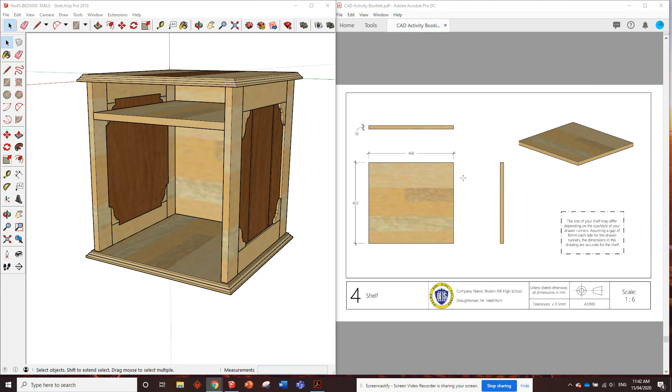You are to design your own profile for the plinth. I'll show you how I drew this one, I'll see if I can remember how I did it. But try and do your own design, don't just copy mine, try to customize your own.

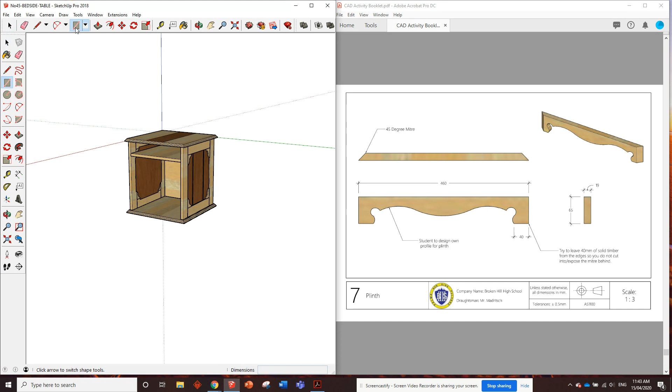We'll draw it a little bit out of the way, not underneath, so we've got room to play with. We'll go here with the rectangle tool. Remember, you've got to hover over the origin point first if you want to snap onto that green axis line. So we're going to put in a piece that's 460 and 19 millimeters thick.

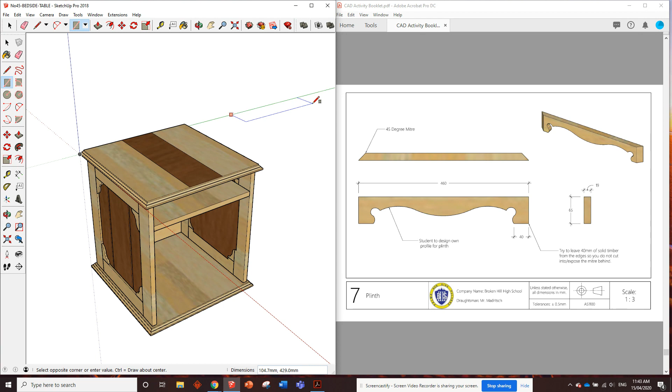So we'll go 19, 460, and then we'll push it up by 65 millimeters. 65, enter.

We'll triple click, 1, 2, 3, right click, make component, call this plinth. Now, double click to edit it.

First thing we need to do is put miters on the corners, probably the easiest part of this to do. So we grab the protractor, click on this corner, make sure on the blue axis, click once, click in the opposite corner, drag it out that way, and type in 45, enter. Exact same on the other side.

Click, click, and 45. There's those 2 lines we can trace. Grab the pencil tool, go from the corner to the intersection, and we'll just use the push-pull tool to get rid of those. So you can see we've got miters on the corners now.

Now, there is one thing that I specified in the drawings, which I'll show you in a sec once I get rid of those guides. It says try to leave 40 millimeters of solid timber from the edges, so you do not cut into or expose the miter behind.

When we're actually making this design, if this part of the curve finished really close over here, you would actually see the miter behind, you'd expose this miter joint. So we want to try and leave at least, I think that's going to only be 20 millimeters. But if you leave a bit more of a gap, it's just better safe than sorry. Try and leave a bit of solid timber on the edges.

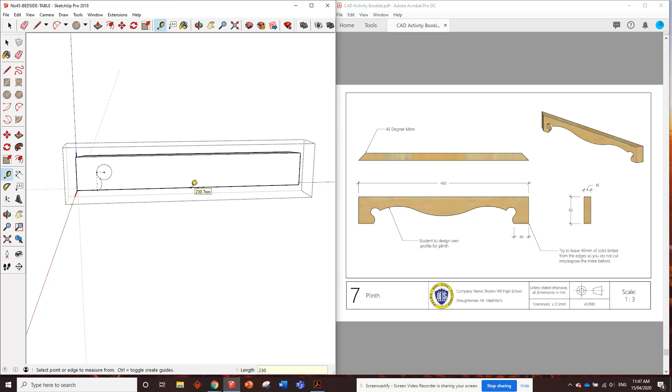No, 230. There we go. There's our center line. Now the bottom of this arc, I reckon that probably looks... what we're actually looking for is where these two arcs meet, which I reckon is somewhere around there. And that might be halfway.

So if this is 65, halfway up would be 32.5. So 32.5, and let's say it's 70 millimeters out that way, and 70 millimeters out that way. Right, we'll grab a 2-point arc from there to there.

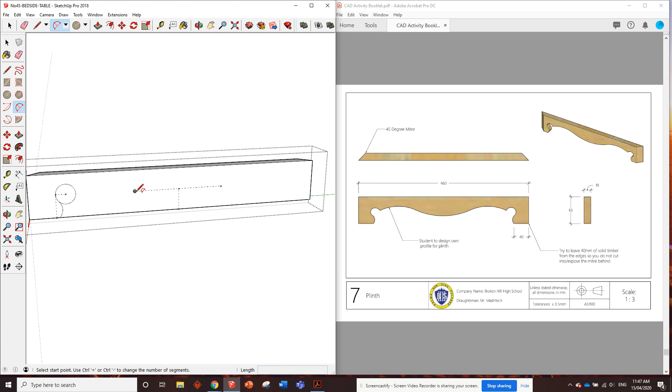We'll go down, bulge of 15. I think that looks pretty good. And then we go from here to probably here. Does that look okay? That looks like a nice, smooth curve, but I'm not sure if I'm happy with this. Oh, hang on. Oh, that didn't actually touch there. That's a problem. Control Z. Here to here, maybe.

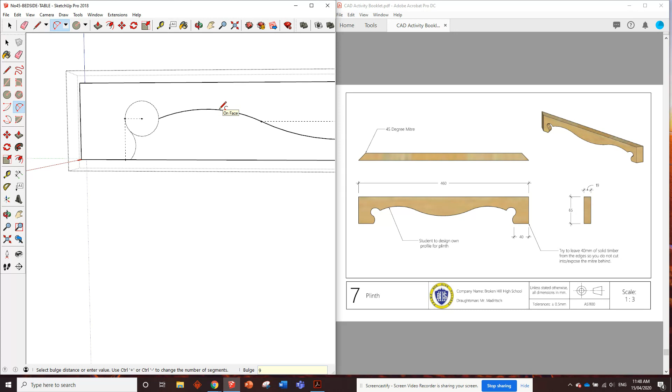So can I get that tangent somewhere? Maybe a bulge of 9. That looks like a pretty smooth curve. And now I can erase that. And yeah, that looks pretty good. I'm actually pretty happy with that.

Let's put it across to the other side and see what it looks like. So to do that, we'll just need to measure in from the corner, 40 millimeters in. We'll need to pinch this line, that line, and that line. Press Control C. We want to get the Move tool, hit Control, and grab it from that bottom point.

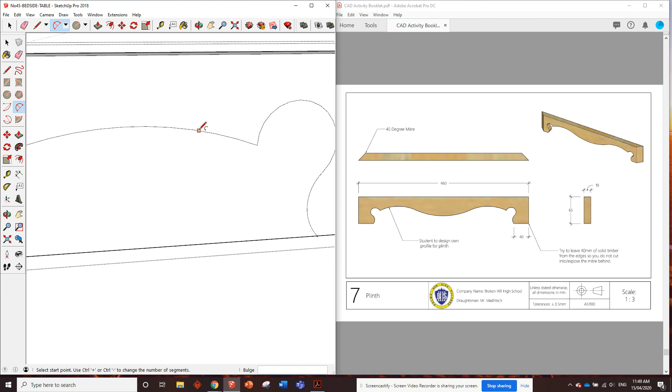We want to right click on it, flip it along the green. Yes, first time. How good's that? Okay, move it to that point, and I guess we're gonna have to delete this line and just put it in again, from here to here to the end point. And what was the bulge? I think I said 9.

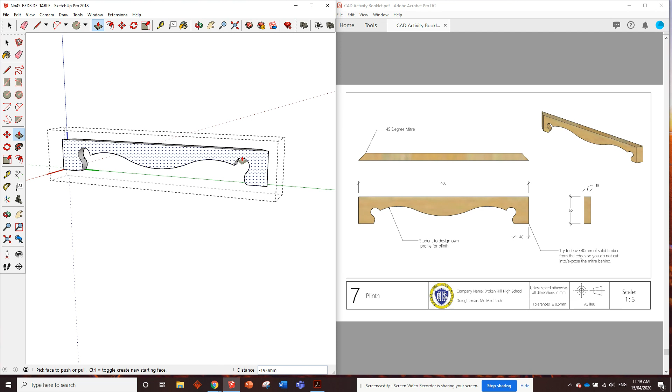Okay, so that looks pretty symmetrical. And if I push that away, yeah, that looks quite nice. Pretty fancy design - this is one of my weak points in woodwork. I suck at designing stuff and making it look pretty. But if I were to do it again, or modify it, I'd probably move these circles a little bit further down because I think it maybe looks a bit too skinny up the top there. Other than that, I think that looks quite nice.

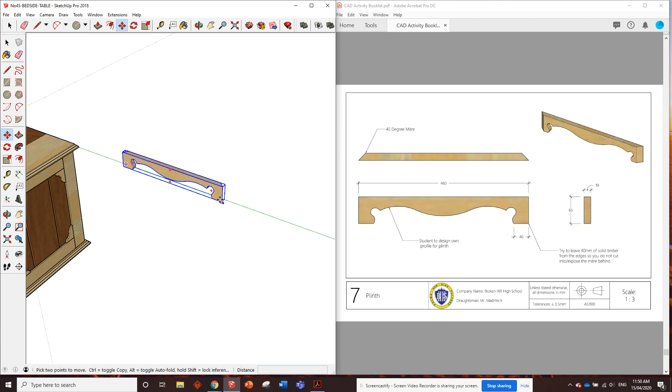So let's leave the component. Let's paint it. So where's my paint can? There we go. Now, to multiply that four times will be pretty easy. We've just got to use the Move tool, hit Control, and grab it, make a copy.

Then on the top edge, grab that red node, tilt it to 90. There we go. Grab it on the corner and move that to the next corner. Now, we can select both of these if we hold down Shift or Control. Then we can grab the Move tool, hit Control, make a copy of both.

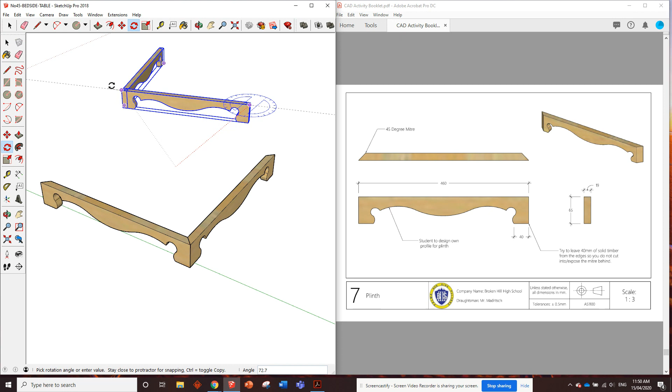And then we can again, there's no node to rotate that. We can use this, the rotate tool, from here to here, and swing it around 180 degrees. Grab the Move tool and put it from corner to corner. And then we've got a nice sort of square base to go underneath.

So let's highlight all of that, right click and make it a group so they stay together, so whenever we move one, we move them all. Yeah, that looks like a pretty nice base, I think. Kind of matches that sort of fancy profile, I guess.

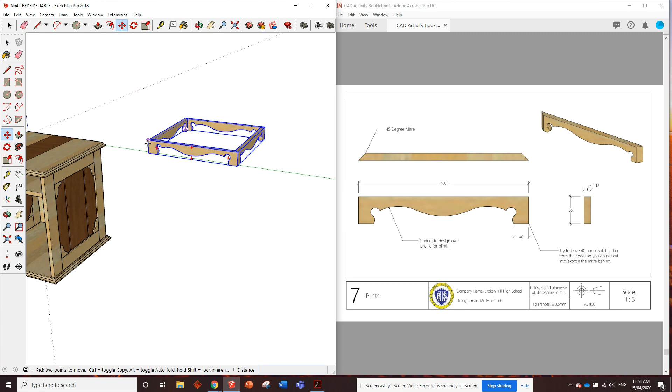Now, let's grab the whole thing. We're going to move it to the underside. So grab the top corner of it and move it to that bottom corner here, right? Then what we need to do is, just like we did on top, we're going to measure this gap from there to there, and that's 40 millimeters. So we need to move it along this direction, 20 millimeters.

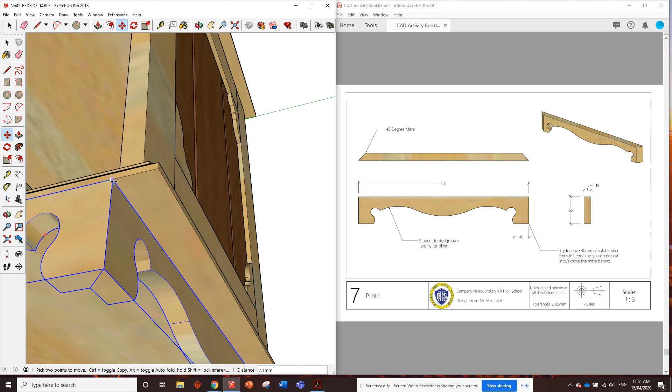A 20 millimeter gap on each side, and then we need to measure this, and I'm assuming it'll be 40 as well. Yep, 40. So we move it this way, 20 millimeters. Okay, so there we go. That's the plinth in place. That looks pretty good. Okay, so next video we'll do the drawers, and then once we've got the drawers in, we can move the shelf into the right position, and yeah, that'll do it.